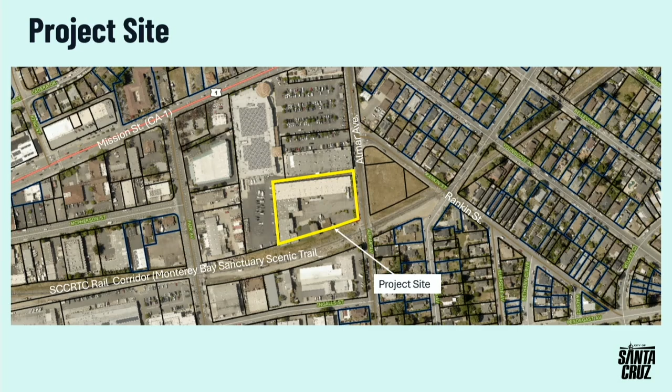An early consideration as being presented before you tonight provides the Planning Commission with the opportunity to review the appropriateness of the project's concept and the proposed land use, and in particular, to contemplate and evaluate the proposed residential use for the project site. If the proposed development project is further pursued, it will require approval of a suite of entitlements, including a planned development permit, special use permit, a design permit, density bonus request, non-residential demolition authorization permit, coastal permit, and potentially others.

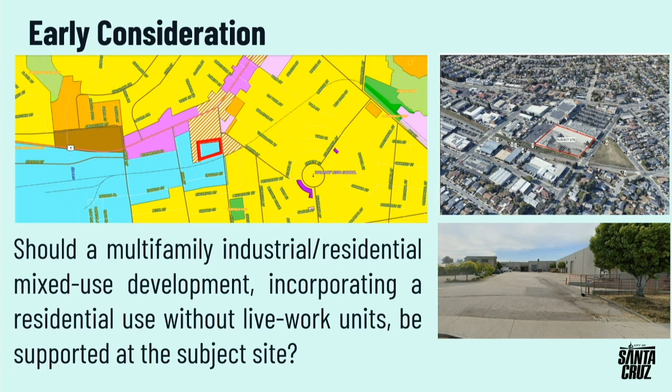A planned development permit is a discretionary permit which allows the commission to consider the appropriateness of the requested land use and allows for consideration of the submitted scope of work and project design. The city's municipal code states that a plan development permit, or PD, is intended to accomplish several primary goals. The first goal is to provide an administrative technique to foster development plans for eligible lands which serve public objectives more fully than development plans permitted under conventional zoning regulations.

The second overarching objective is to establish criteria for identifying those parcels of land in the city which are eligible for the special procedures available to applicants proposing creative development plans requiring special review and approval procedures. The municipal code includes 5 criteria of eligibility for a plan development permit, which must be addressed by the project. Among others, the public interest in achieving goals stated in the general plan must be served more fully through the plan development process than through the application of conventional zoning regulations.

The municipal code also includes findings required to be made for approval of a plan development permit, or PD, including that the PD is consistent with the general plan, the local coastal land use plan, and adopted area plans; that it's consistent with the purpose of applicable sections of the zoning ordinance; that it includes planned variations to underlying district regulations which serve public purposes to an equivalent or higher degree than would underlying district regulations; that it can be coordinated with existing and proposed development in surrounding areas; and overall the amenity level of the development and the amount of open space shall be greater than what would have been permitted by the underlying district regulations.

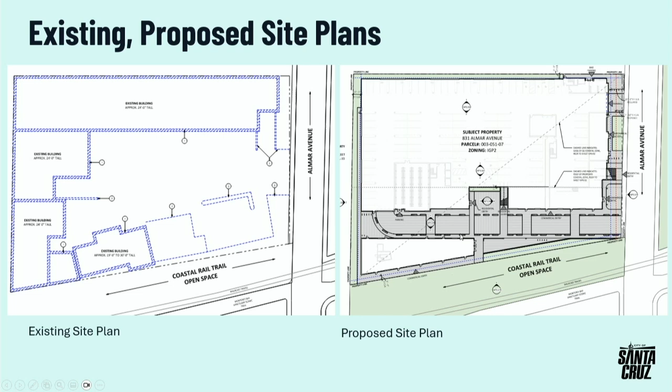Through review of the pre-application and the formal application for the project, several concerns have been identified regarding key elements of the project scope and design. Number one, perhaps most importantly, the requirement for preservation of employment capacity remains a prevailing value as established in the city's general plan and supporting documents.

The proposed project would result in a loss of approximately 31,371 net square feet of industrial land capacity, as a difference between the industrial building area demolished and the new industrial commercial area proposed. Such a loss of industrial building area has the potential to reduce employment within city limits, which employment finances city services, reduces long distance commuting, as well as associated loss of productivity and environmental and quality of life impacts, and promotes long-term vitality of the city.

The project's interface with the public right-of-way along Almar Avenue, shown on the easterly side of the site, lacks certain design features which encourage active use. Also, a third element: the design of the wall or barrier along the Santa Cruz County Regional Transportation Commission rail trail corridor obstructs visibility and interaction with adjacent Monterey Bay Sanctuary scenic trail areas.

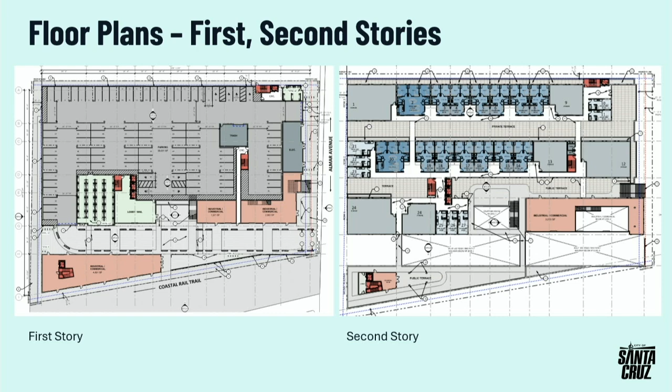Consistent with the city's public outreach policy for planning projects, a community engagement meeting was held on November 4th, 2024. Approximately 68 members of the public attended, and participants offered a diversity of feedback ranging from concerns about the loss of available on-street parking capacity to expectations for worsened neighborhood traffic and loss of walkability.

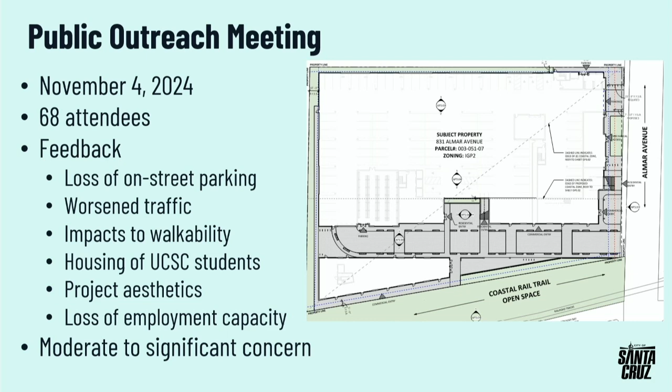Attendees also stressed the importance of housing UC Santa Cruz students on the UCSC campus, as well as concerns about loss of industrial and therefore employment capacity. Attendees offered suggestions for project improvement, including enhanced articulation, integration of traffic calming measures, inclusion of a childcare facility in the project, and integration of features for management of migrating shopping carts and deterrence of skateboarding, among others. Overall, attendee reactions could be characterized as ranging from moderate to significant concerns, particularly regarding impacts to existing surrounding residential uses, although some participants expressed support for the project.

One of the suggested revisions is that the industrial/commercial tenant spaces should be placed at the project's public frontage along Almar Avenue, built to a minimum depth of at least 25 feet on the ground floor, with exceptions to that depth allowed for building ingress, egress, and access to parking or loading areas, along with flexibility in depth accommodated for second floor industrial spaces. So again, the suggestion is that additional industrial space be provided, particularly on the ground floor along the Almar Avenue frontage, and also where possible on the second floor.

The project site is located within a half mile of one or more major transit stops and is subject to California Assembly Bill 2097, which exempts the project from the provision of vehicular parking. Some of the areas proposed to be dedicated to parking capacity could instead be dedicated to industrial space. The ground floor area shown here in gray is essentially all parking, and parts of those areas could conceivably be used for expansion of industrial space.

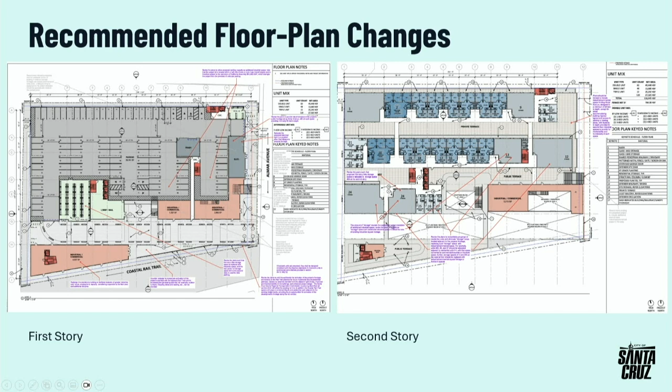In response to the early consideration of the requested planned development permit, the Planning Commission may recommend one of several options. Option number one is that the Planning Commission could recommend that the City Council direct the applicant to proceed with the requested planned development permit.

Should this be the Planning Commission's recommendation, staff would recommend that the Planning Commission incorporate the recommended revisions to the project scope and design as discussed and identified in the staff report.

Option number two, the Planning Commission could recommend that the City Council direct the applicant to pursue a general plan amendment, rezoning, and local coastal plan amendment to allow for further consideration of the proposed project.

Option number three is that the Planning Commission could recommend that the City Council deny the project with or without prejudice. Option number four, the Planning Commission could recommend that the City Council defer judgment of the proposed project to a later date after more information has been provided.

It is recommended that the Planning Commission recommend to the City Council option one of the four options. That is, staff recommend that the Planning Commission recommend that the City Council direct further pursuit of the planned development permit with staff recommendations for further refinement of the site and building design, as mentioned earlier and as described in the staff report, and further specified in the staff recommended floor plan changes document provided.

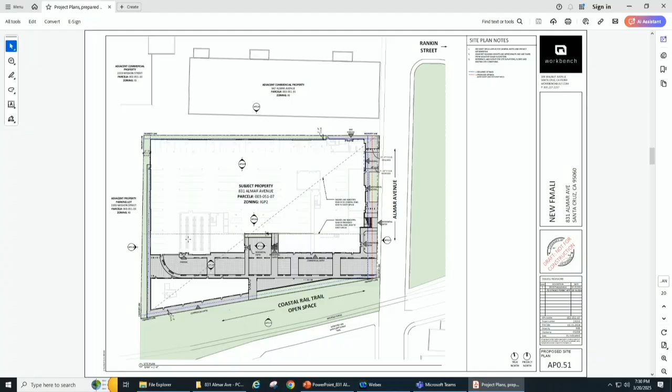Hopefully that will change, and hopefully we will have a design that can accommodate that change and take advantage of a rail trail that's fully improved, that this site can continue to support. So that's pretty much what we wish to ask for tonight, that you let us get on with a community process, a discretionary process that engages all of you in a discussion about the highest and best use of this site. Thank you. I'm available for questions if you have.

Thank you. We're going to go a little out of order. I think we're going to return commission questions for staff and then possibly for you as well. Any questions for staff?

I have a question. So there was an SB 330 application for this project. Can you talk about how that intersects with this planned unit development proposal? And how would an SB 330 project that consists of this project before us, mostly residential, be processed with the underlying zoning? I just don't understand that connection.

Sure, thanks Commissioner. I can try to explain that. When the project was first brought before staff, we weren't entirely sure what entitlement pathway would be undertaken. It's pretty standard for large-scale development projects to submit a pre-application under SB 330 to vest the project, meaning lock into place the local regulations in place at the time the pre-application was submitted. It's what we see in most large projects these days.

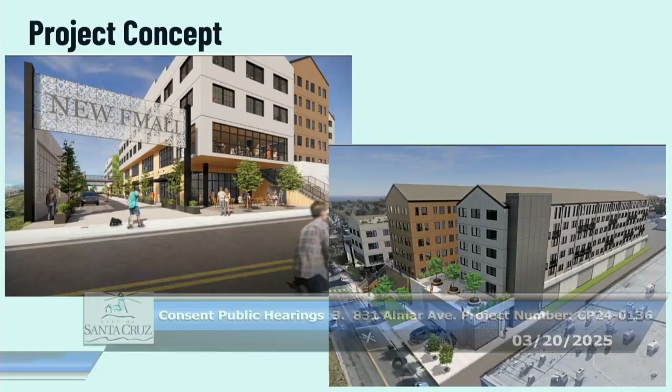Well, I think it's fair to look at the renderings of this project to see 2 stories along the tracks, to see 3 or 4 stories beyond that, and then the larger buildings backed up against the Safeway project, the general square footage, the general density. It's safe to say that's what the project's going to look like. Beyond that, we're looking forward to a discussion with staff of how we can make this the best project and how we can contribute to making this a very walkable and usable street as well.

Commissioner McKelvey. Sorry, one more question. Just to follow up on what Commissioner Gordon is saying, my reactions to the renderings and the design have a lot to do with the comments that staff have made about kind of activating that street frontage. And when I see that garage door and those walls that are creating the boundary of the parking, those are the things that I'm interested in talking about. Are those still things that are in flux?

Oh, yeah. Absolutely, okay, absolutely. Great.

Okay, any other questions for staff or the applicant?

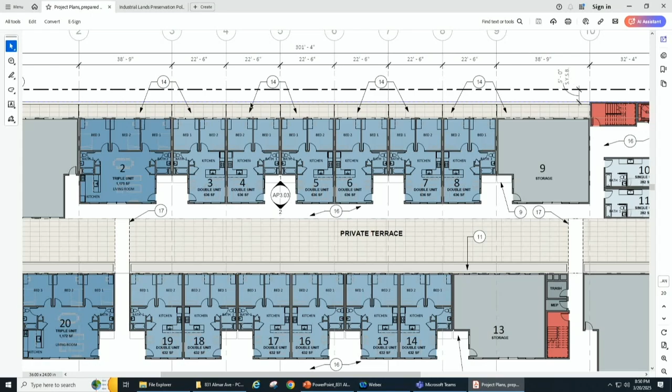The final thing, in the renderings, if you can pull those up quickly — near the lobby there's a rendering that shows a lot of people congregating in that space near the staircase. Not that one, down in the row a little, just adjacent to the lobby. We often see renderings that are misleading.

I didn't write the page number down, but it's near the lobby in the plan, like where that upper walkway is — zoom in on this lower right one here. So in that space right there, there's not really anything to justify activating that space as the rendering says. My other comment would be: let's see some realistic renderings, some real, genuine, activated spaces that are justified, and let's not put in green walls that we know aren't gonna live and look like that. Let's look at renderings for this next iteration of something that's actually gonna be built, so the community has an idea of what they're really gonna see in the end.

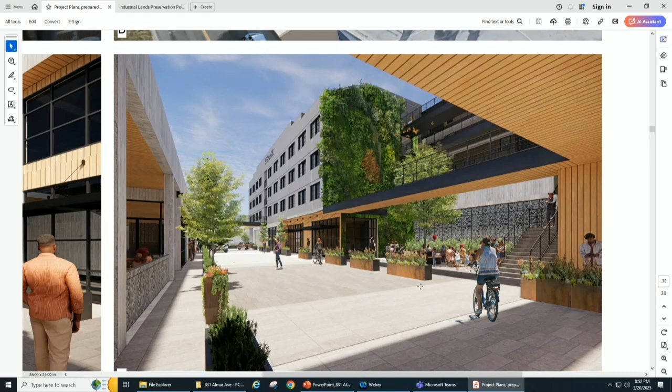Commissioner Kelly: I'm actually ready to call the question at this point, I think everyone's been able to share. Motion to call the question? Is there a second? There has to be a second first. Second. Okay, motion to call the question — discussion first, I believe. Sure, motion to call the question has been seconded.

Is there discussion? I actually had some suggestions and further comments to make, so I wasn't quite ready to vote yet, though there's a motion been made, so now we have a vote. Any other discussion?

Okay, can we have a roll call vote? Commissioner Kelly? Aye. Gordon? Aye. Dan? No. McKelvey? Aye. Thompson? Aye. Alhamis? No. So that motion passes and the question has been called. Do we have a motion?

Take a stab at it. I think this has been useful because we've got to hear from the applicant, but we've also had a chance to talk about it amongst ourselves. I think it would be very useful for it to come back to us still at a fairly conceptual level, because there are some serious questions raised by the commission tonight, but we've also heard a lot of good intentions on the part of the applicant that would be a lot easier for us to understand with some graphics. And I think they can be diagrammatic graphics, because I don't think this is so much about the aesthetic outcome as it is about how this is really going to be integrated to the site and the neighborhood.